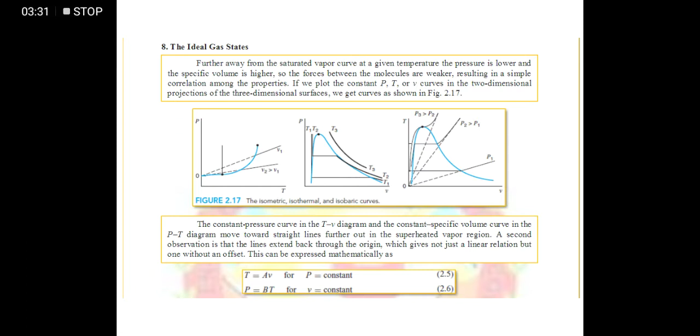But I think throughout our discussion previously, we didn't cover the basic idea or characteristic of this graph, which generalizes the idea about the use of this one in relation to the state, or in relation to its simplicity. If we read this graph, this is just a characteristic that arises here in our graph, so giving you a small overview about this, this is actually about the characteristic of this one.

As you can see here, for example, this graph of T versus V, temperature versus specific volume, during when the pressure is moving from this line here to here, our characteristic of temperature and volume is opposite. Usually the pressure in this case is moving from zero up to the evaporated state of our liquid.

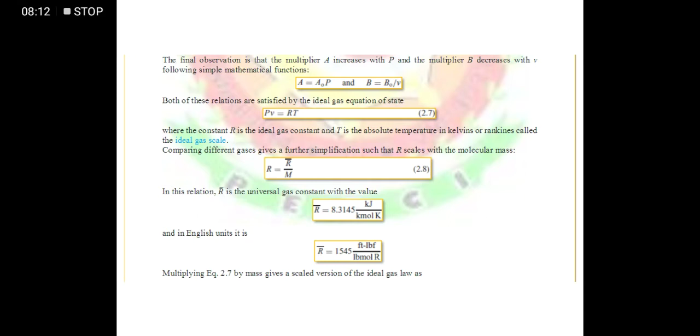So that's actually where the idea of the ideal gas law was derived, okay? So just read this one, okay? About this simplification of this formula of this ideal gas law. So we have here example number 7.

It says here, what is the mass of air contained in a room of 6 by 10 by 4 if the pressure is 100 kilopascal and the temperature is 25 degrees Celsius? So in here, our volume is given, that is 6 by 10 by 4, our pressure is given, our temperature is given, and then assuming that at room temperature at a lower pressure, as you can see here, our pressure is 100 kilopascal.

Usually it is below the saturated pressure. It means that we can assume here that it is in an ideal gas state. So we can already use this equation 2.9 here. So that's why here, solving for mass, since mass is what we're looking for here, mass is equal to PV over RT.

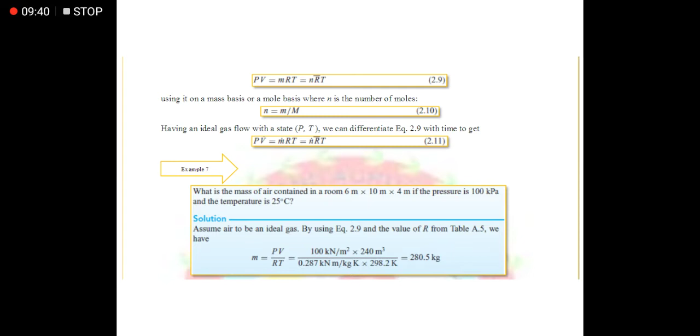So given R, given the pressure, given V, given our temperature, all we have to do here is to plug in the values. We have here 280.5 kilogram. Okay, same with this one.

So we have here a tank that has a volume of 0.5 meter cube and contains 10 kilograms of an ideal gas, having a molecular mass of 24. The temperature is 25 degrees Celsius. What is the pressure? So as you can see here, our R bar is actually given there. Then our molecular mass is given,

24 kilograms. So therefore, we can actually find the gas constant. So you have here 0.346. So that means we are given the mass, so we can directly find the value of our pressure. Same with this example, it is just expressed in English units, so please refer to it.

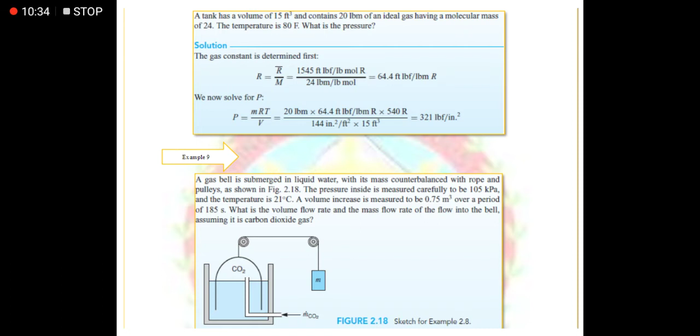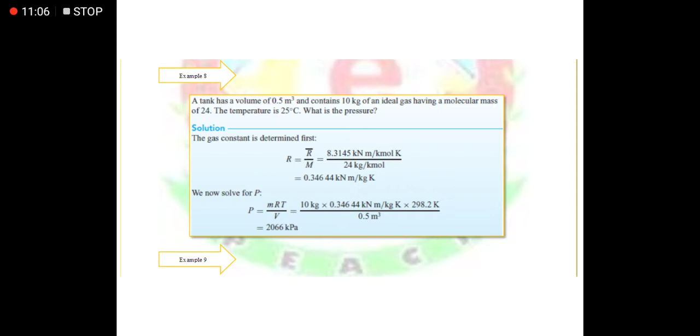So example number 9, it talks about the volume flow rate of our substance or gas, using an assumption of ideal gas. So, it's the same as earlier, but in our previous examples, what we were talking about is only the volume and the mass. In example number 9, we are talking about the flow rate. That means the change of volume or the change of mass of the substance with respect to time.

So, we still use the same equation, but as you can see here, we now have m dot and v dot, which signify the mass flow rate and volume flow rate. Okay, so just read that, it's still the same idea.

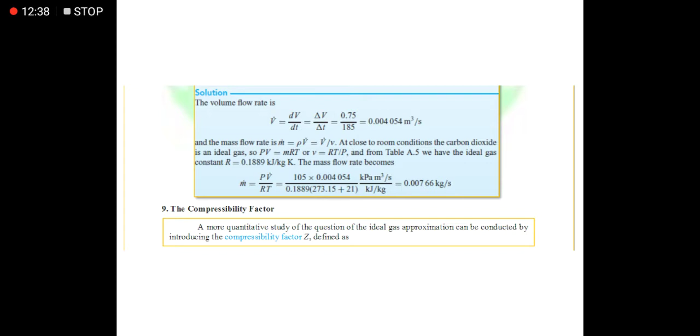Okay, now, the question that arises here is, in what situation can we assume that the substance is in an ideal gas state? So we can actually assume that the given gas is in an ideal gas state if and only if we have studied its compressibility factor. Basically, the compressibility factor talks about how the given substance deviates from the ideal gas state.

So, this is what we will study here. Compressibility factor, as you can see from equation 2.12, is equal to PV over RT. Now, what's the reason I said this equation talks about the deviation of a substance from the ideal gas state? It's because, as you can see here, if we assume our Z is 1, this equation will result in the ideal gas law.

Right? But if we assume that this Z is less than 1, we can no longer assume an ideal gas state. So, if we read this paragraph, that's what it means.

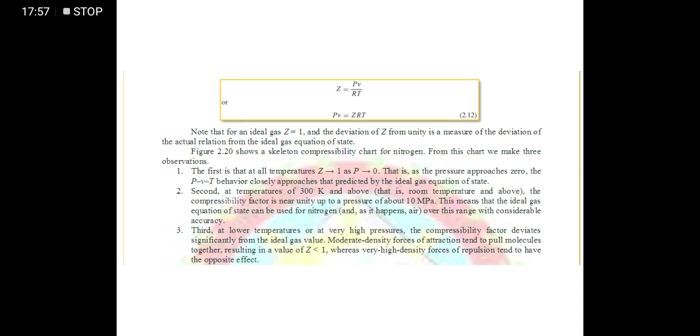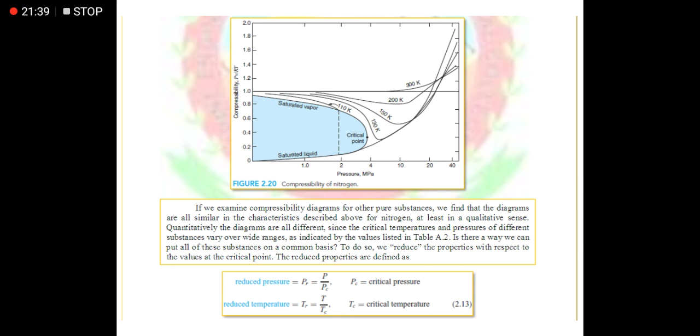Yan yung titingnan natin sa generalized graph natin sa figure D.1 sa appendix D to see if the situation is nearly at ideal gas state or not. So meron tayong different examples dito. So pakibasa na lang.